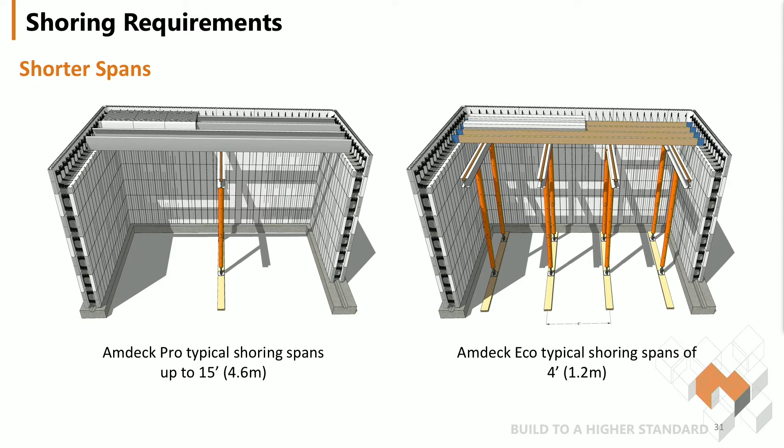For shorter spans, there isn't much difference between the Pro and Eco versions in terms of the wood and metal joists, and it would come down to the shoring spacing requirements. Amdeck Eco would need to follow typical spacing of 4 feet, while Amdeck Pro can be supported roughly every 15 feet. This spacing can change based on what the structural engineer determines.

For some longer spans, the wood joists might need to be done in 2 sections, since lumber is usually maxed out at 16 feet in length, while the steel channels can come in much longer lengths. In a situation like this, the inside ends of the wood joist would have nothing to sit on. This is where the wood screws with washers come into play, as we showed in the previous slide.

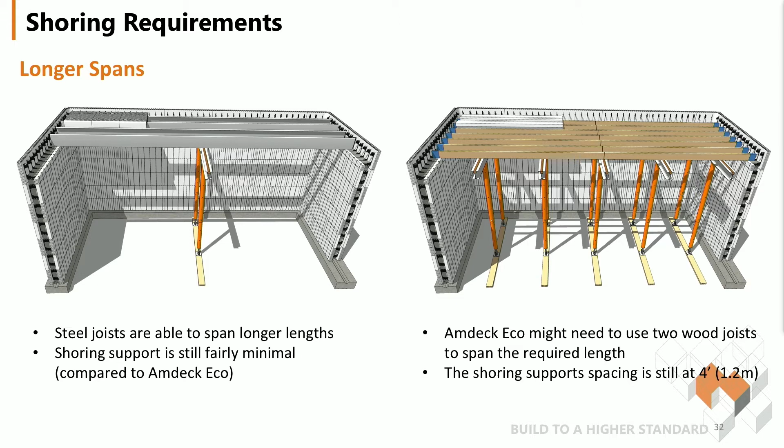These anchors will get embedded into the concrete and basically allow the wood joists to hang after the shoring has been removed and the concrete is cured. This is especially important for situations like the one you see here.

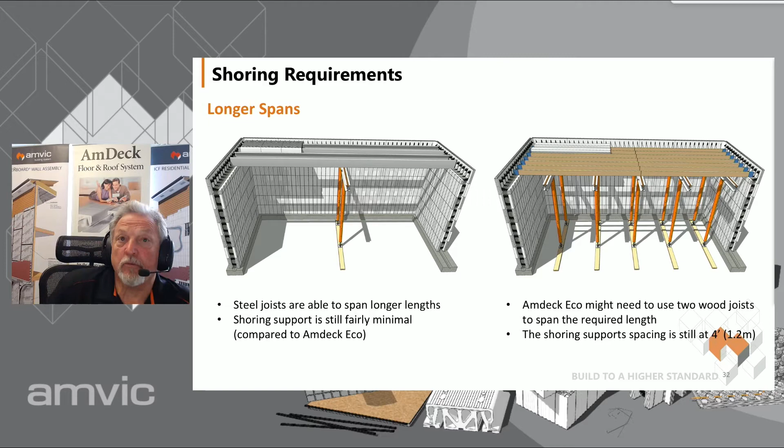If you're looking to use Amdeck to span, for example, 50 feet, then your Amdeck system would need to be double spanned. Double span Amdeck would require different reinforcement to that of a similar configuration with only a single span. For example, the reinforcement of a 24-foot single span and a 20-foot double span would be different.

When doing a double span, a structural support in the center is needed, which would typically be either a steel beam or a concrete beam. The steel beam can be under the Amdeck system or inside the floor system.

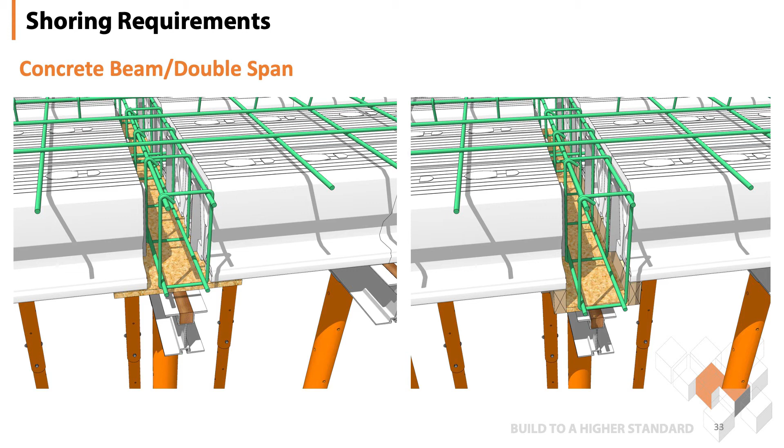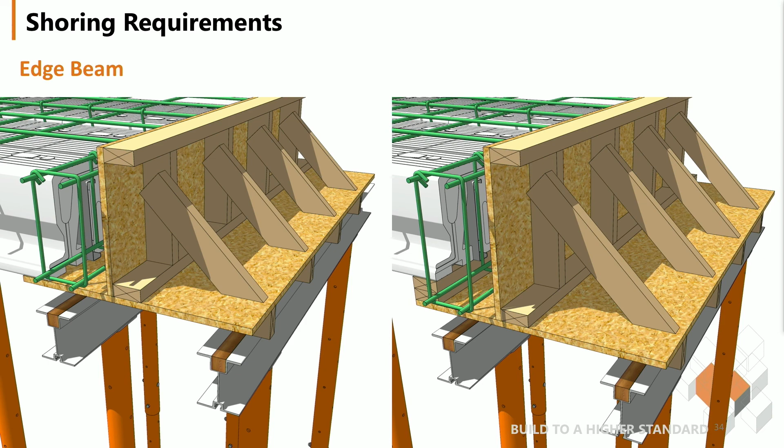Just to emphasize this again, Amvic does provide a design guide for the reinforcement, which needs to be approved by an engineer. Things like shoring and beams would not be part of the design guide, but would be done by the same engineer.